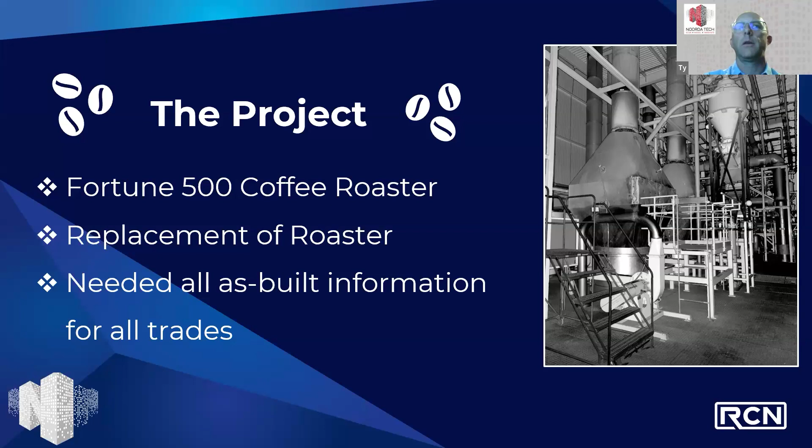The engineering firm went to the client and said, hey, we're going to be here for weeks pulling measurements trying to figure out what's here and where we can run new equipment, or we can bring in Noorda Tech and they can laser scan everything. It'll take them a few days and you don't have to turn anything off, you don't have to stop roasting coffee, you don't have to get your employees out of the space. They can capture all the measurements, then disappear for a month or more and deliver us a model we can work with to do the redesign, to take out the old and put in the new. So they were brought in, mainly because of the limited impact we would have on the space.

So we're showing these images - it's a very complex environment. There's a lot of steel, a lot of mechanical, electrical, plumbing, process piping, all those things. This is a small portion of a very large facility, and having the impact of finding a way to capture those existing conditions - those of you who work in reality capture know there's really no replacement for laser scanning right now. It's the best way to go in and measure and capture everything.

So having that low impact and being able to capture everything - actually this image you're seeing on screen is from the scanner, so that's part of the virtual tour we created. Our two main deliverables to the engineering firm would be the model, which we deliver in both Revit and Plant 3D that they then use in Navisworks Manage, and then the virtual tour that allows them to walk the space at their computer as they're doing redesign and coordination meetings. So is there anything I missed there on the project setup and how we got in the door?

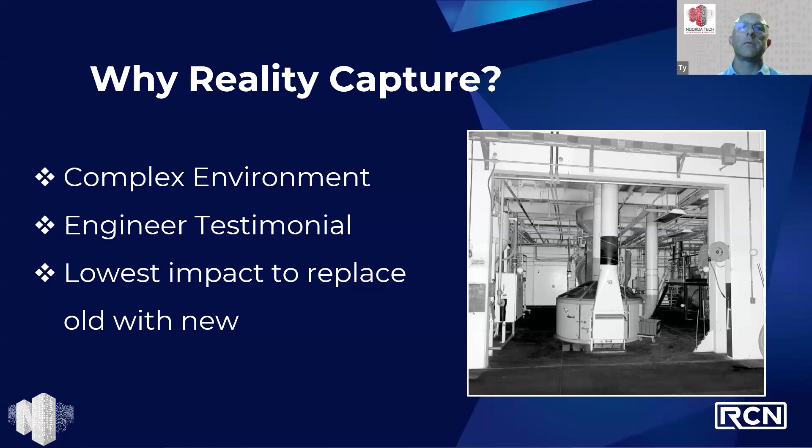The original ask on this project was drafting everything that was 2 inches in diameter or larger, as the engineering firm and the client were trying to save costs. So we were cutting down on that from what we drafted.

Every project that we do is customized, different levels of included equipment, different sizes, different scope areas, etc. So everything we try to talk through with our client and figure out what the key points are to make this project a success. How do we capture what's going to make them successful? And today, with so many different sensors available, we have that conversation so we know what tools to take to the job, what tools to use to capture the environment.

In the case of this project and most projects like this, it's going to be TLS scan, terrestrial laser scanner on a tripod, getting that finer point cloud, additional detail that's a little better than we can get from a SLAM scanner. But oftentimes we're doing both. On a facility like this, we've been back multiple times and done others like it, so it might be a mixed capture. We might do terrestrial laser scan in the heavy mechanical, heavy processing areas, but use a SLAM scanner or mobile scanner in the warehouses and office areas to get the whole picture.

And then we're unifying that into a single point cloud. Or we might mobile scan the whole thing just to give that pretty virtual tour while scanning this kind of space in black and white, because that's all we need. It saves us money, saves the client money, saves us time.

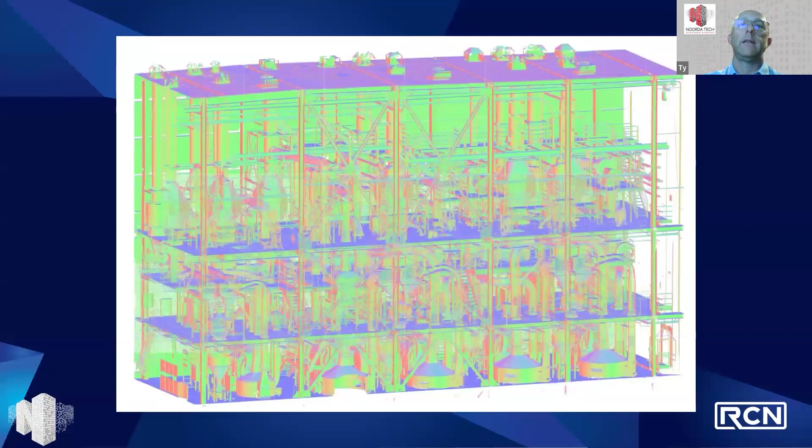Using the right tool for the job and capturing what needs to be captured with the scanner. Once all that coordination was done, we walked into the space with one person on site, and it took us 3 days to capture these 3 levels, 5 or 6 roasters.

Super helpful, yeah absolutely. I'll push over so we can see some of the model overlaid with it, this amazing Revit model that you built, and we can look at the model in a little more detail here as well.

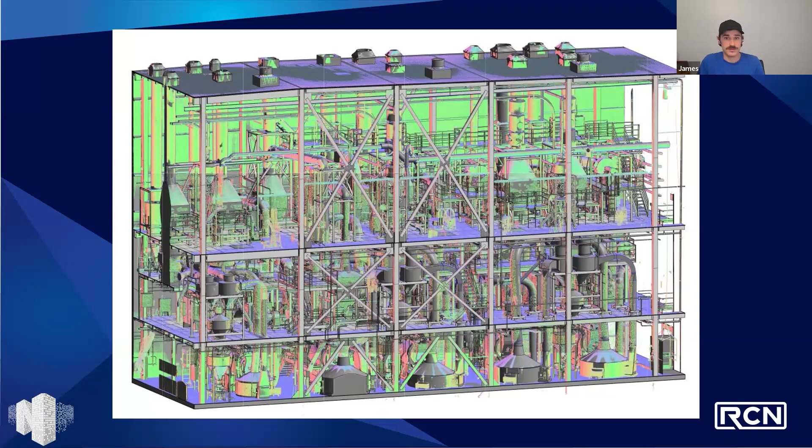During your capture phase, one of the things everyone speaks about but is really critical is finding the right and best tool for the job, and this is a terrestrial laser scanner scenario. Did you need survey control for this application? I noticed you had spheres throughout the job, using your Faro terrestrial scanner with the spheres. Did you create survey control, and how did you mitigate any drift moving from one level to the next if you didn't? And was this a recurring job, or something you had to come back to the site for multiple times, or was this a one and done delivery? How did that impact your use or non-use of survey?

Yeah, this was a one and done, a single site capture for this phase. We have been back and added onto this scan since then.

This was scanned with a Faro Focus at the time, scanned in black and white, no color. Everything's pretty much the same color in a space, it's all brown and coffee when you walk away.

There are worse facilities to scan like this that you could. Yeah, there are worse things facilities to smell like. It's not quite as good as cookies. Cookies are really nice, but you do get tired of the sweet smell.

But loop closures are important, overlap is important. I don't want to focus on teaching how to create a quality scan in this webinar, but you have to have that overlap, you have to have loop closures. Luckily, we had multiple ways to connect the levels to get a tight point cloud.

We did not deploy survey on the original scope, but we have since established survey control at the site because the client pushed back on survey on the initial visit. Then afterward they said, well, we need to align this to the existing plans. We're like, if we'd have just laid control, we would have had something to tie it to. So we now have permanent survey control on the site, tied, geolocated, and any future projects we do can be tied back into that control. So not used initially, not needed.

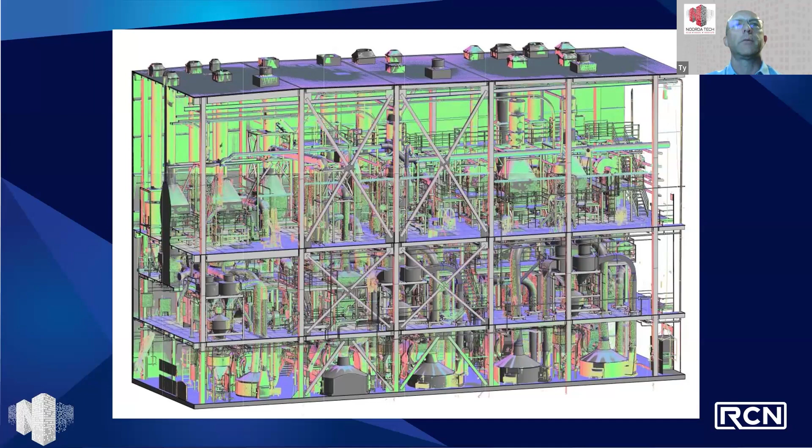I want to jump into the timeline now. This project was scanned in December of 2019, and we spent 6 weeks drafting the model for the client, delivered end of January. That's where the COVID part of this conversation comes in. Our client was super happy with the virtual tour and the Revit model as they were ready to kick off their design process, and would have to make major changes to the building and to the way the process piping was going to connect.

The new roaster is drastically different than the old one, so the space requirements were very different. They couldn't just build it into the existing structure. In fact, they told us there was 85 tons of new steel added to this building to make the project work.

We delivered the model, thought everything was wonderful, thought the project was done, and then COVID hit. Everybody left their offices, went to their homes, and the client called and said, hey, we can't go back to that site, but the client still wants us to deliver this design and installation of the new roaster on schedule. So needless to say, that's a small challenge.

They had budgeted $50,000 to do weekly visits to this site out of state to verify existing conditions during the design phase, figuring what they needed to take out and how they'd fit all that new equipment into the building with the process piping already in place. So they called us and said, hey, we know we asked for 2 inches and above, but now we need everything. Can you model down to an inch, smaller if you can?

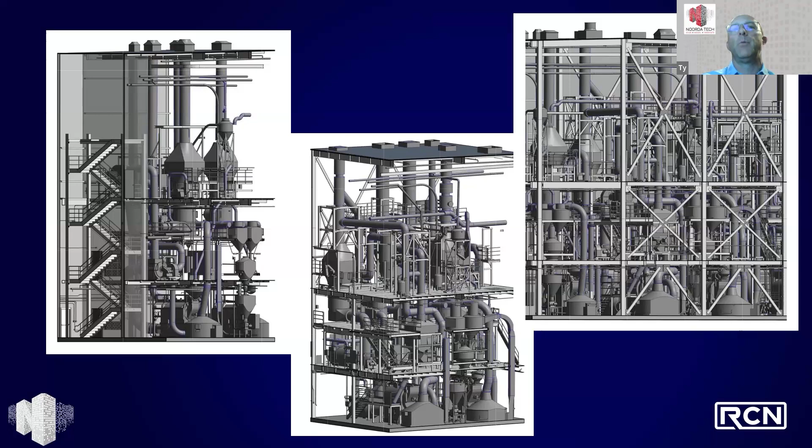Everybody's sitting in their own house, having these conversations during this time, and they never touched that $50,000 travel budget that they had set aside. This is probably a good point to mention that our cost, even after adding the additional modeling, was less than the $50,000 they'd budgeted for travel. So the overall win for this project is our services saved the day and saved the money.

It's a net positive. Yeah, I mean that's great. That's how, I guess coming back to the sale piece, that's what it should be at the end. So it's great to see a success, not just a technical success, but a full success in the whole scope of the job.

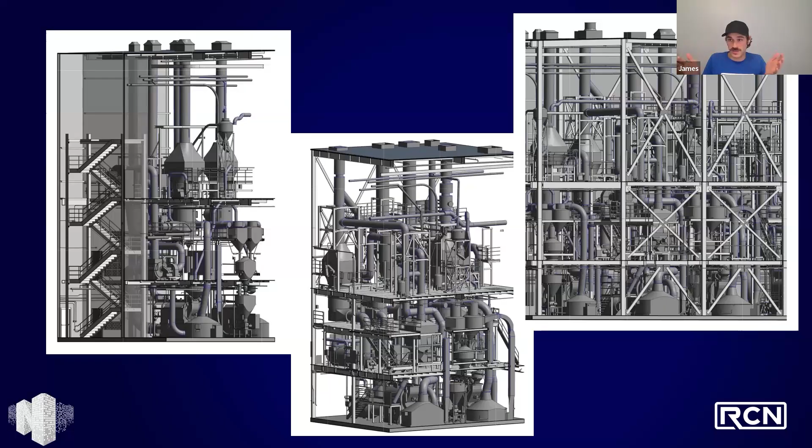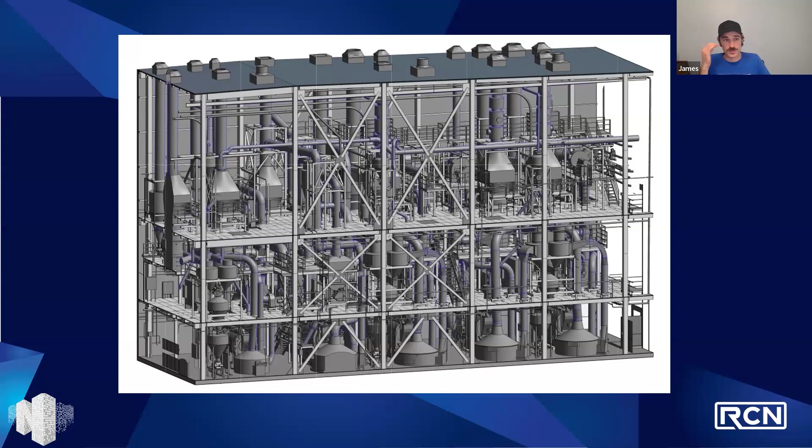So that's awesome. Being able to have all those trades looking at and getting copies of, if they requested, the model and the virtual tour, to be able to dive in, know what they're looking at, full measurements - all those things from each part of the project.

They were talking about all the trades: fire protection, HVAC and plumbing, electrical, process equipment and rigging, process electrical, processing utility piping, structural steel. Everything was tendered, evaluated, and awarded remotely without visiting the site.

All pre-construction activities, coordination meetings - it's a lot to undertake, and it was a major shift for everyone to have to adapt. Kudos to the people involved in this project. There's a stigma of people in construction being stuck in their ways and not wanting to do new things, but this was a wholesale case of everybody, from the client to the engineering firm to every sub, adopting a new way to do business.

And while it may not be the way it's 100% done in the future, it definitely highlighted the value of what a tool and a product like reality capture can do for this type of work.

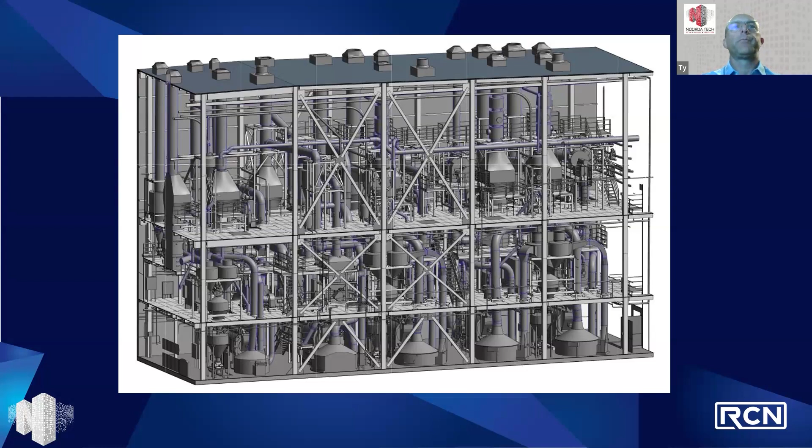Just talking a little bit about the how of it for the owners on this meeting: our client loads the model into Navisworks Manage, their main tool for coordination and conversation. They can go in and click on any single item because it's a BIM model - a true object, not just a mesh. They can click on it and hide it or delete it, making room for the new stuff.

Then they draft - take the digital asset of the new roaster and set it in that model. Everything's sized and scaled appropriately. They can even move it through the building to get it to the space, to know how they're going to route it and make sure there's space to fit it in the building.

And once it's in place, we start drawing all the connecting piping and design, connecting up to existing facilities. There just isn't a replacement for this type of work - there's no better way to do it than starting from true existing conditions. Unless you capture them right before the project starts, it's not really what's there.

You can get super technical and say the building's 80% of what it was when designed - but those plans are all 2D, not 3D, so we might make mistakes in that translation. Things move and change over time, and those surprises lead to change orders. Change orders lead to delays, and delays lead to more money. Then the end client, the roaster, is unhappy because things didn't happen on the schedule they thought, because there were surprises.